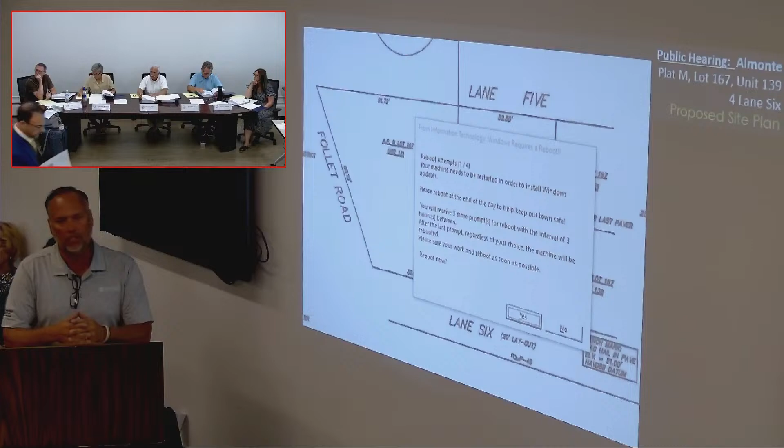So I'm here tonight to talk about my addition that I'm planning on doing. I'm raising my existing house up, putting a foundation underneath it, putting it back down on its footprint, bumping one wall out 4 feet and putting a second floor addition on with a sundeck. It's in Breakwater Village. I'm here because we have some zoning restrictions. I'm governed under the 60-40 rule, and my current design meets all the setbacks, bars, and height restrictions.

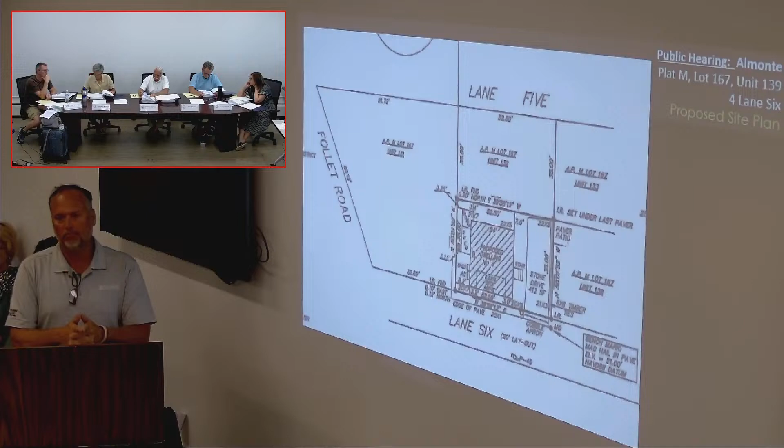Okay, and you're here for a special use permit? I am here for a special use permit. Have you been before the Breakwater Village Association for approval? Yes, I have. And you received that approval? I did. As well as the planning board approval. Do you have any witnesses you want to call? No, I didn't.

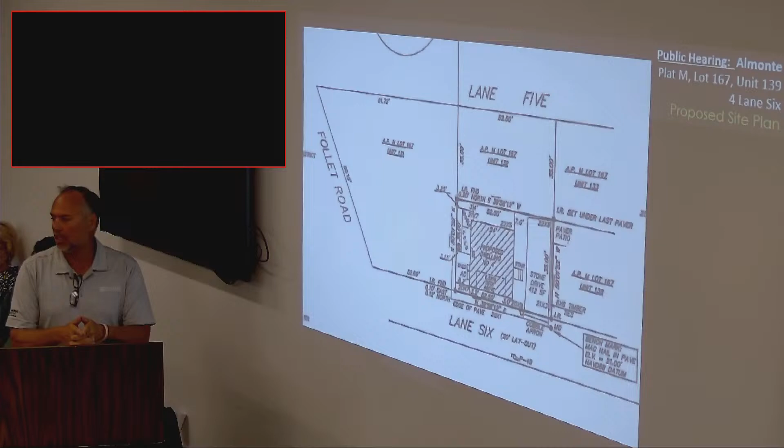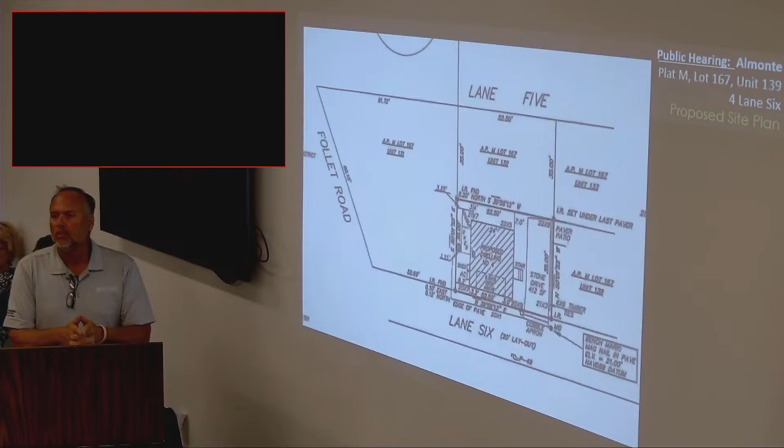Oh, go ahead. Mr. Almonte, hi. Could you just describe the surrounding properties, the properties that are near you? Can you give me an idea of what the height of the buildings are? Sure, okay. You have a pointer on the podium. Oh, okay. This is my existing dwelling right here. My neighbor here, this... sorry, is it the one bordered in yellow or the one right there?

139 right here. I don't know why this one's bordered. This is the neighbor behind me. This house is basically identical to my height, roughly 14 feet to the peak currently. This neighbor's house right here is approximately about 30 feet high, and my next door neighbor, this side right here, is about 35 feet high. The 30 and 35 feet high ones are newer builds, would you say? These are pre-2010 builds. This one I want to say was 2005. This one is about roughly that same era. So I'm governed under the current rules, which is 24 feet high and 60/40 because of my lot size, which is under 2,000 square feet.

Okay, and from there, where is the water? The ocean is about... well, there's a cliff right at the end, which is Shore Road. It basically runs perpendicular to Lane 6, and it's down a cliff, and it basically runs along the shore all the way to Galilee. Okay, and this road here, what is that road? This is Follet, and there's wetlands back here.

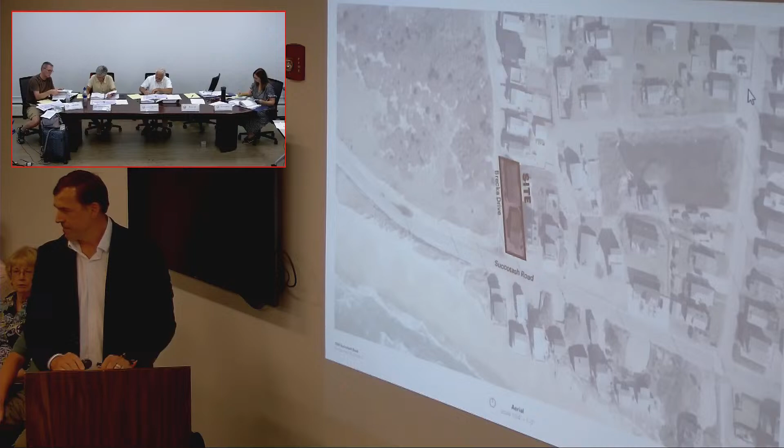In a minute I'm going to let Jake walk you through this, but first, what's your profession, Mr. Watkins? I'm an architect. How long have you been an architect? 25 years. Have you been accepted as an expert in architecture by municipal boards previously? Yes. I would request that Mr. Watkins be so recognized tonight. For the purposes of this hearing, Mr. Watkins will be recognized as an expert in architecture.

Yes, so Jake, if you will — I'll run through a few slides of the project. This is the first slide showing the location on Succotash Road and Brecka. The neighborhood is generally characterized as a dense neighborhood, single family and multifamily homes.

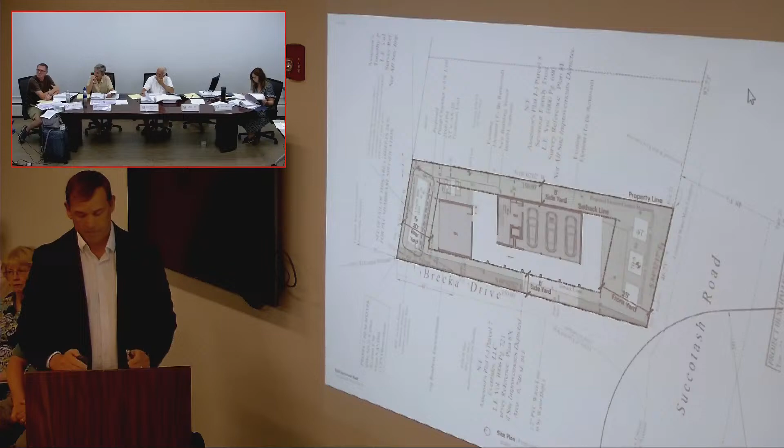This is just showing how the rear yard will become more conforming, from currently 7.1 feet to 21.25 feet; 14.8 feet to 25 feet in the front; and 2.2 feet on the side to 8 feet on the side.

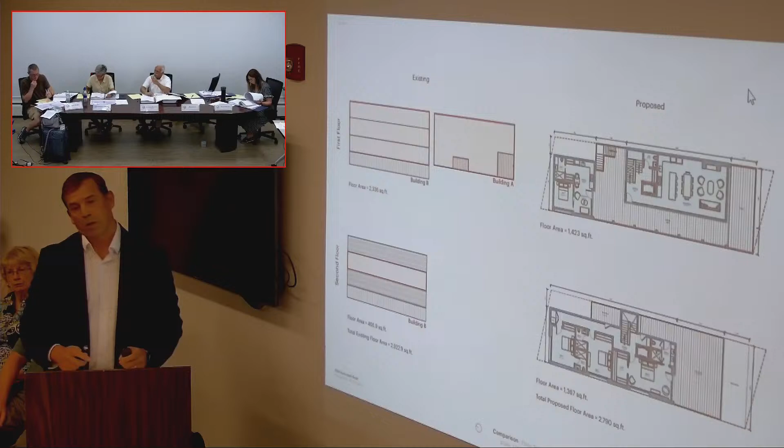From a square footage point of view, the total square footage will also be brought down from 2,922 to 2,790. So from both the coverage perspective and the total area perspective, we're actually reducing the amount of square footage on the site.

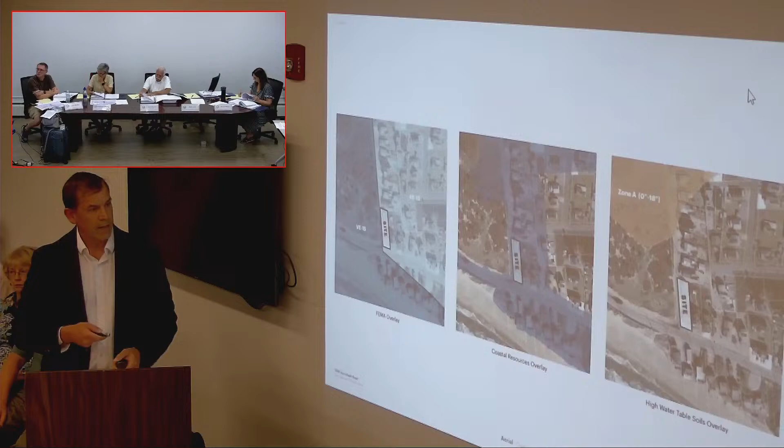There are a number of encumbrances on the site: FEMA overlay, coastal resources overlay, and high water table soils overlay, which we are addressing with the design.

The biggest point we're addressing is making the new residence FEMA compliant. The current average grade is at 8. The base flood elevation is at grade 13. The current lower level of both residences is about 5 feet under the current base flood elevation of 13. The new occupiable first floor will be raised above the base flood elevation of 13 to 17, so 4 feet above. The lower level will be used as storage and parking, with a second story placed above as well.

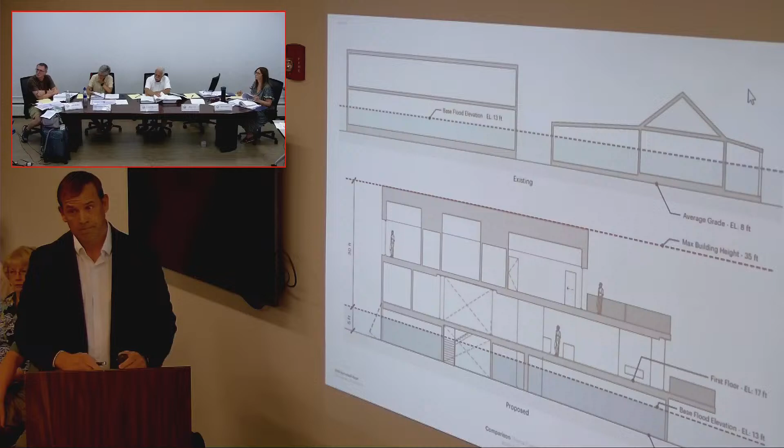The total height of the project will be 35 feet, 30 feet above the base flood elevation line. All we're showing here is that from all the different zoning perspectives, we're either making it completely conforming or more conforming than its current state. The base flood elevation compliance means it will become FEMA compliant.

All the setbacks will conform. The overall coverage is being reduced by 160 square feet, and the overall floor area is being reduced by 132 square feet.

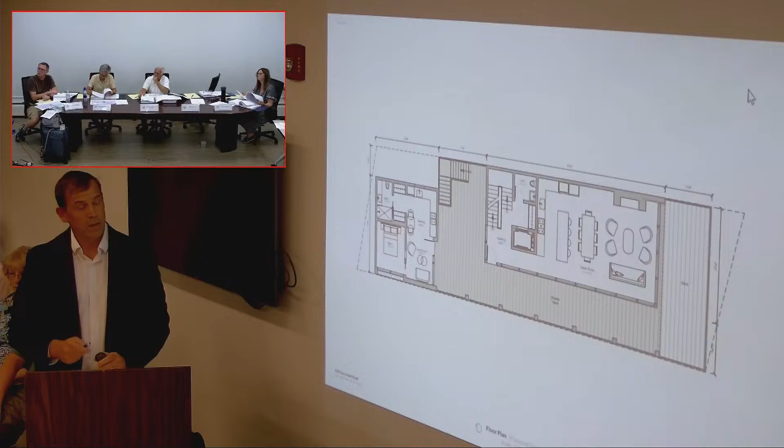This is a series of plans showing architecturally what we're doing. The lower level will be used for off-street parking and in-garage parking, with storage space on this rear footprint. The main level is accessed through the stairway above the FEMA base flood elevation line, with the main living space toward the front on Succotash and an in-law unit at the rear.

The second floor consists of 3 bedrooms, accessed from the stairway from the main level we were just looking at. So when you're looking at the total structure, it looks like a complete single element on the site, raised above the floodplain, with living space and bedroom space on the second floor.

I ask Al Diorio to address the site parameters. If there are any questions for Mr. Watkins, that's the extent of his presentation, so it would be appropriate to inquire of him now.

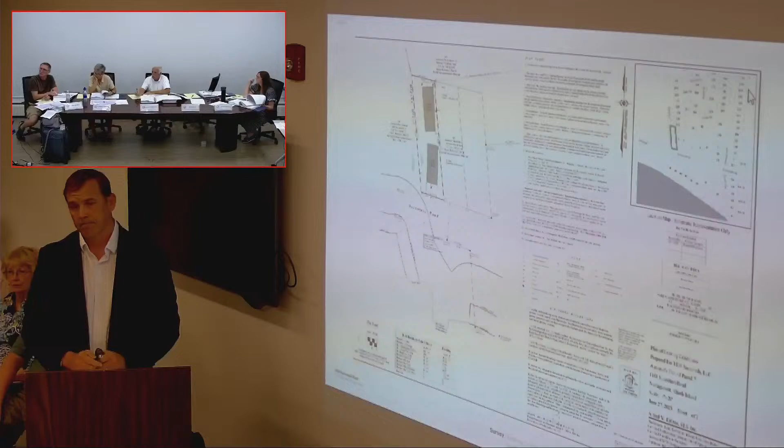Sure, okay. I understand you clearly, we're only looking for special use permits, there are no setback requirements, no violations there, you're not meeting any... you're meeting them all. You're becoming less non-conforming. Yes. And not necessarily conforming. Yes. Got it, thank you.

Is the character of the dwelling and the proposed structure consistent with the surrounding area? I'd say it directly derives from the vernacular in the neighborhood - the pitched roof, the wood siding, the window fenestration, the divided lights - it's all derived directly from the coastal vernaculars around the neighborhood.

And you also mentioned aging in place. Is there... I didn't mention that. So I can have the principals speak at the end of the presentation about what their intended use is for the property.

Okay, can you go to the floor plan for a minute? What is this? That's an elevator. That's all I need to know, thank you. That's what I thought. Are there any further questions for Mr. Watkins? Thank you, Mr. Watkins.

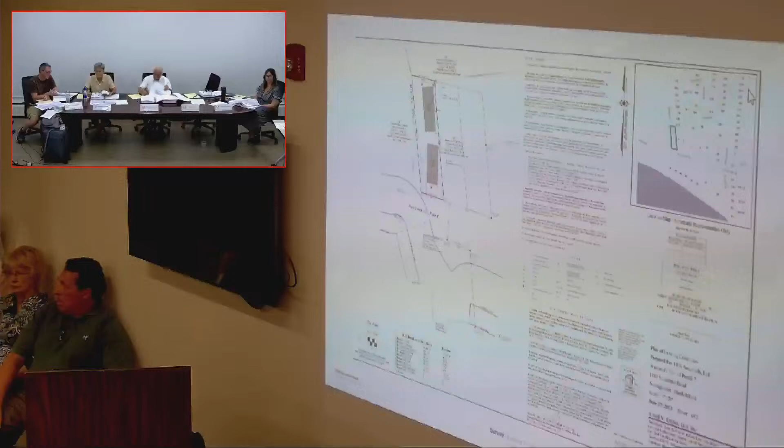Please raise your right hand. Do you solemnly swear that the testimony you're about to give will be the truth, the whole truth, and nothing but the truth, so help you God? I do. Please state your name and spell your last name. Alfred W. Diorio, last name D-I-O-R-I-O.

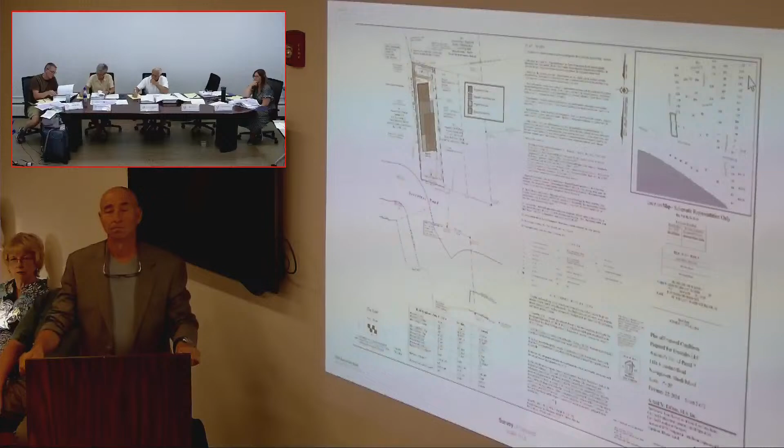Thank you, Mr. Diorio. What is your profession? I'm a professional land surveyor. And how long have you been a professional land surveyor? 45 years. Do you have any other professional certifications? Yes, I do. What are those certifications? I hold a Class 2 and 4 designer's license for DEM. I'm also a certified floodplain manager, and I have a designation as a certified professional in erosion and sediment control.

Okay, and that gives you the credentials to design OWTS and stormwater systems in compliance with DEM regulations? Within the confines of Class 2, that is correct. And how long have you been developing site plans and consulting on land use projects for clients? Something in excess of 50 years. And how many residential development projects have you prepared site work on? Around about... hundreds. And have many of those projects been in coastal communities? Yes. And that includes design of OWTS and related systems? That is correct. Have you been accepted as an expert by municipal boards in the past? Yes, I have.

I request that Mr. Diorio be accepted as an expert in site design and compliance with DEM regulations and as a professional registered land surveyor. For the purposes of this hearing, Mr. Diorio will be recognized as an expert witness, as a professional land surveyor, site design, and DEM regulations. Thank you, Mr. Chairman.

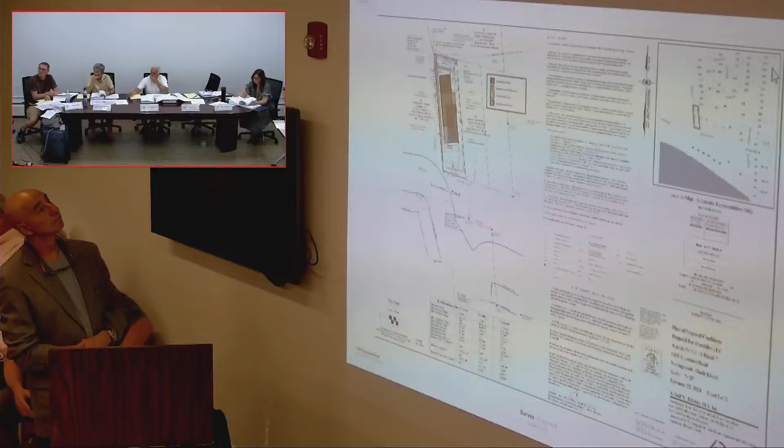Did you design, Al, the site plan for the property at 1108 Succotash Road? Yes, I did. Can you please walk us through how the OWTS system works? I can, and I'll preface that by saying I'm sure the zoning board members are very familiar with these kinds of systems. I'll be as brief as possible, but if there are questions, please just let me know and I'll dig deep.

Generally, effluent leaves the building via a building sewer. It then is transported by gravity to a specially designed septic tank, which also has a treatment pod over it. This is where the denitrification process takes place. The effluent leaves the pod and is directed to a pump chamber, and in this pump chamber there is a special UV disinfectant component.

This effluent is then discharged into the bottomless sand filter at the northerly portion of the site. I'll draw your attention to the one component that goes above and beyond what most denitrification systems embody, and that is the UV disinfectant component.

Did this system receive DEM approval? Yes, it did. And did CRMC provide any comment on this? We have a CRMC preliminary determination.

Does this OWTS system comply with all state and local regulations? Yes, it does. And did you design the stormwater treatment for the property? Yes, I did. Can you please describe how that system operates?

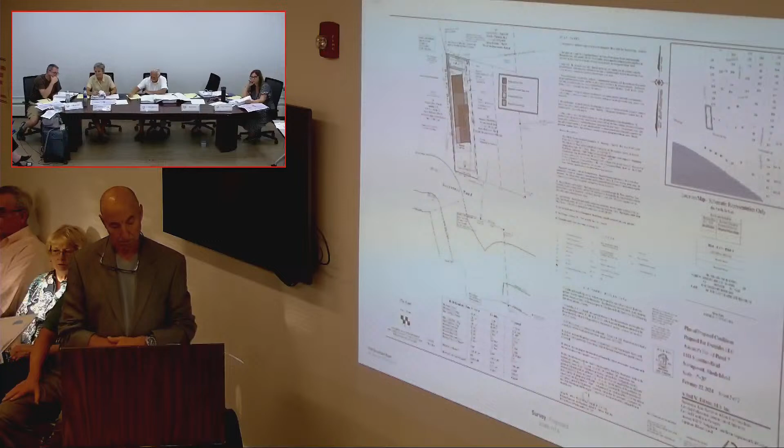Yes. And does the project pose any threat to public health, safety, or property? No, it does not. And does it interfere with access to light? No, it does not.

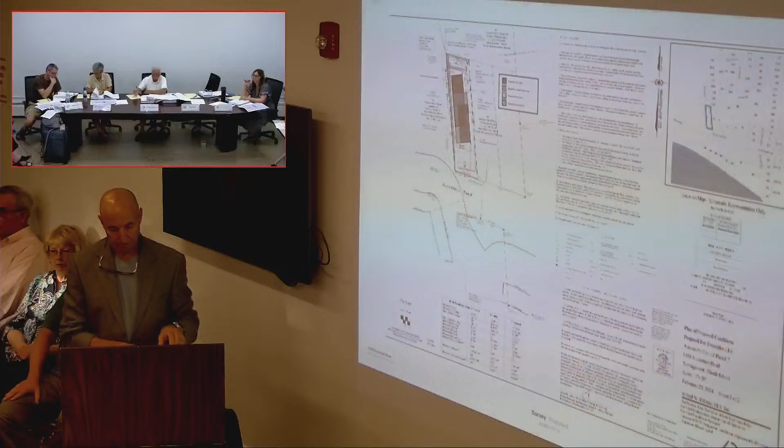There was one letter in the packet that wasn't really a letter in opposition, but it was questioning something. Did you know... let me get it out.

I think this is really an architectural question. Sorry. So perhaps we could see if there are any other questions for Al, and if there aren't, then I can bring Jake back up.

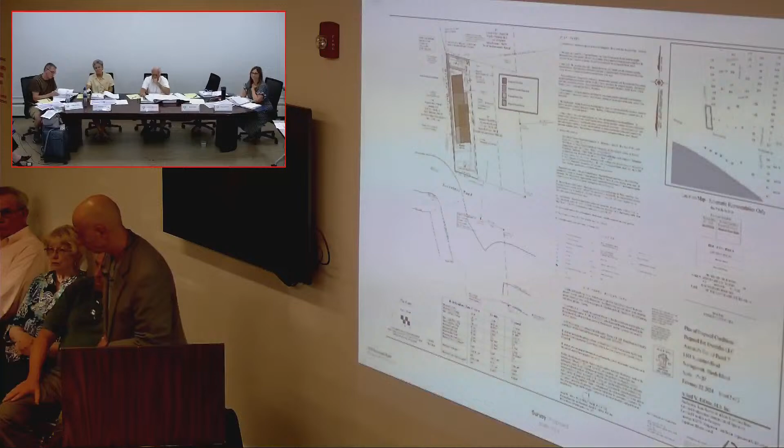Absolutely. Anything else for Al? And I'm Joan, I wrote the letter. Oh, okay. Yes, okay, I can address that. Jake, do you want to comment on that letter briefly? Joan, okay, Joan.

Can you repeat your question? There is a letter from somebody named Joan, who is obviously here, in the packet, which asks a question and doesn't really seem to oppose the project, but asks about some sort of orientation of the project on the lot, and maybe that there's some view issues or something like that. But I don't know, I was hoping somebody could explain it to me because I don't really understand it.

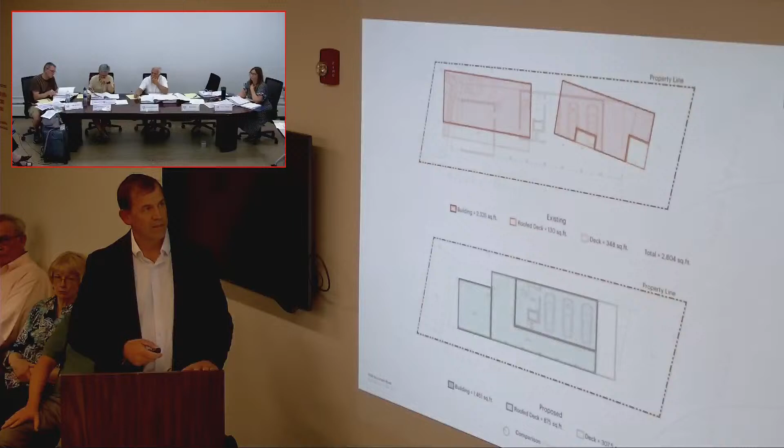If you're talking about the frontage on Succotash, which is here - this is the existing, this is the proposed. The existing is actually too far forward on Succotash. It's not congruent with the other associated neighborhood structures. The new design will be pushed further back from Succotash, and I think being more in line with the adjacent property. So it does...

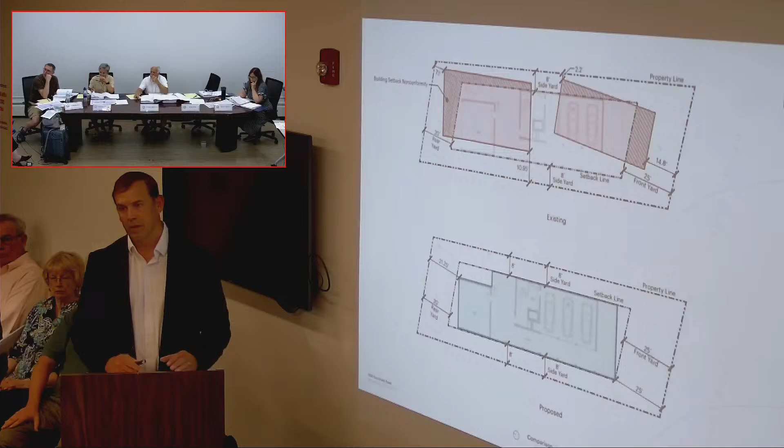Okay, it is pushed further back. It's pushed further back and might be more congruent with the other massing that is in the neighborhood. The concern seems to be that there's now a longer roof line.

A longer roof line, and the person who wrote the letter is actually here, so maybe we just... if she's going to object at that time, we'll just hear from her.

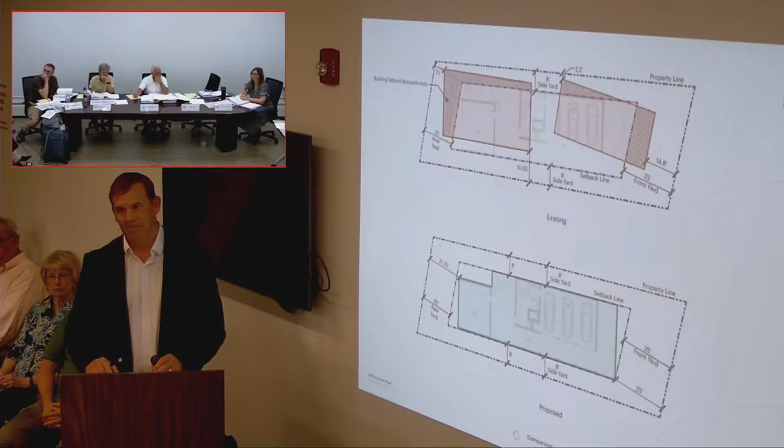Okay, I'll take that. So I think, would the board... Eric, why don't you come up, and we'll have the principal come up briefly, because I know you had a question about aging in place.

I'm okay, oh, that question's resolved. I just didn't see how anyone could age in place without an elevator, and you said that there's an elevator there, so I'm okay, good.

Well, if the board doesn't require testimony from the principal, then I will conclude our presentation and just like to say that we think this project clearly satisfies the standards that were required to be met tonight. So we're relying on the testimony that was presented, all of the exhibits, and everything you have in your file, and we request that the board approve this project.

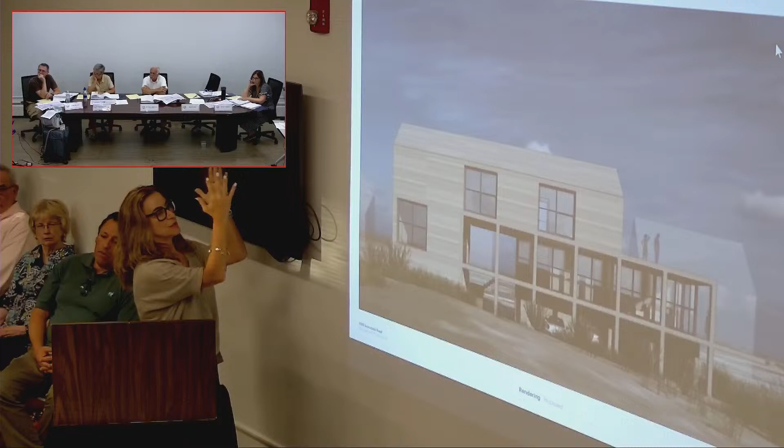My only question was about the roof line being very long, because all the houses on Brecca have peaks facing this way, and I questioned if there's anything that can be done on the roof line to engage it with Brecca, because right now it fits really well with Succotash. But it's a question. The other question was about the amount of glass, because we have a lot of birds and wildlife in the area, and birds can hit the glass and die, fall, or get injured. But maybe there's something with the tinting of the glass we can do to prevent that. That's all I have to say.

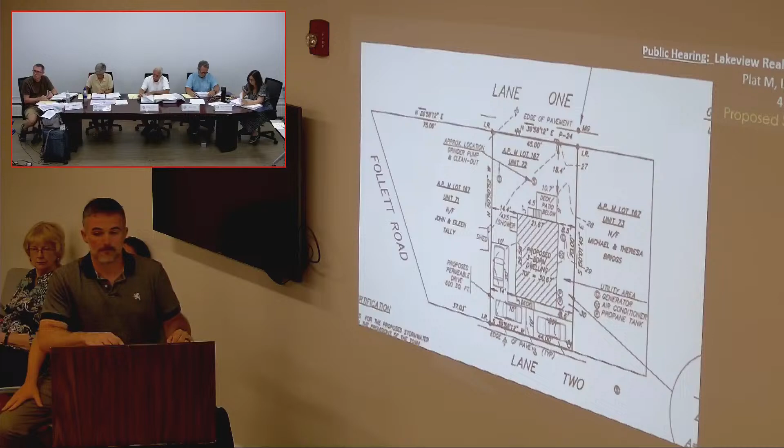So you meet all the requirements, you're just looking for a special use permit. You have approval from the Breakwater Village? Yes. March 29th.

Pretty straightforward. Yes, ma'am? So some of the findings, some of the testimony we would like to hear would help us make the findings and make the determinations. Can you just describe the project and how it fits into the rest of the area? How does it affect anybody's view, light, access to the water, anything like that? If you could just talk about that, that would help us.

Okay. So the owner, Kristen, is selling her house, I believe in Seacon, and she's going to be moving here full-time. She has a daughter who commutes to one of the local colleges, so it's going to be for them. No plans on renting it, it's just a single-family home, 3-bedroom. It's a beautiful design with a couple of porches. The railings and aesthetics all kind of match the neighborhood. It's conforming to the height restriction of Breakwater Village. It's not really on the edge of anything that would be blocking anyone's view. Anyone in the middle of this neighborhood doesn't have a direct view as it is.

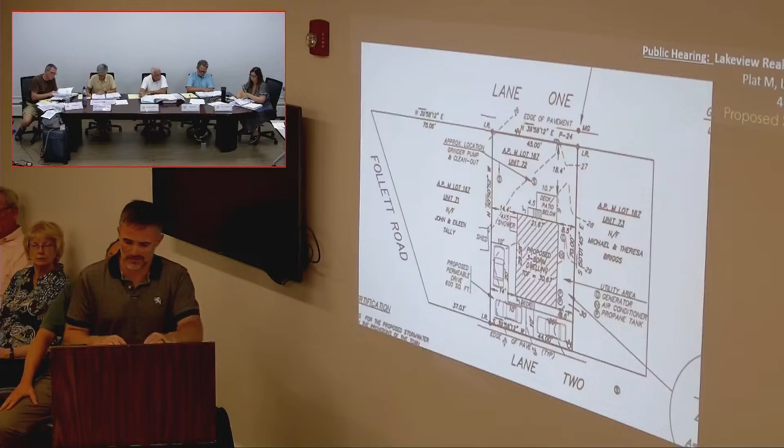Yeah, it's plenty of off-street parking and in conformance of basically everything that they could come up with, and it does have the planning board's recommendation as well. Any other specific questions on that? How many bedrooms? 3. It's going from 2 to 3.

Jill, do we have to determine the appropriateness of the height on this, or is that part of this? You can. Okay, let's. Are you increasing the height at all? Yes. Okay, and what is the maximum height? The height is 28 feet. 28 feet? Okay, is that for a lot this size the maximum height? Yes, that's correct. Good.

Sure, thank you. Brian, you want this back? Yes, please. Looks like that's it. Thank you.

Is there anyone who'd like to speak in favor of this proposal as a proponent? Seeing none, is there any opponents, people who'd like to speak against this proposal? None either.

Okay, if there's no further testimony, then I'll look for a motion to close the public hearing. So moved. Second. All those in favor? Aye. Okay, it's closed. What is the board's pleasure?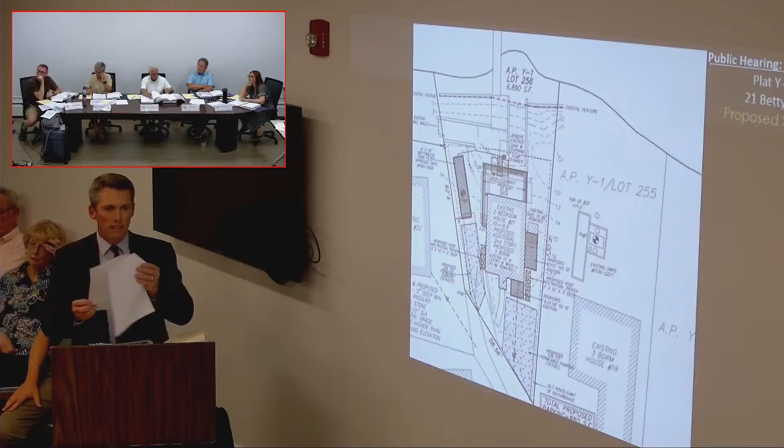And then the lot is obviously undersized. It's in what's called the narrows of Harbor Island. Altogether, the lot is about 6,890 square feet, located in Harbor Island in an R20 zone. The existing structure is 24 by 32, only 768 square feet, and is a single-family dwelling. Again, this will be a single-family dwelling after renovation if approved.

There's a deck on site as well as a shed. The shed will be removed, which is over on the northern side of the home, and in its place, where the dark shadow is, will be a stairwell. The stairwell had to be located in that spot due to the septic system and the driveway on the southern side. There's really no other place to add that stairwell to allow the second floor to be constructed on the house. The actual lower level is uninhabitable due to the flood zone.

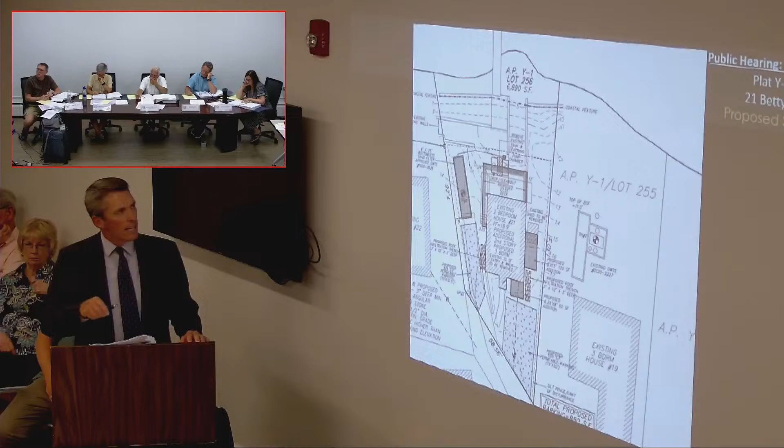So we need a variance on the side setback for the stairwell, and we're asking for a special use permit in the coastal overlay district. Notably, last time we were here, I think we asked for a 16-foot deck to the west. We got approval for 12 feet, and I think the ask now is 14 feet. So we understand if you have questions about that, we're happy to answer them. Again, this will remain a two-bedroom house. It's really just an improvement for the renovation to allow the McShanes to live there in the summer when they come back to visit.

With that, I'd like to ask Alec McShane to come up.

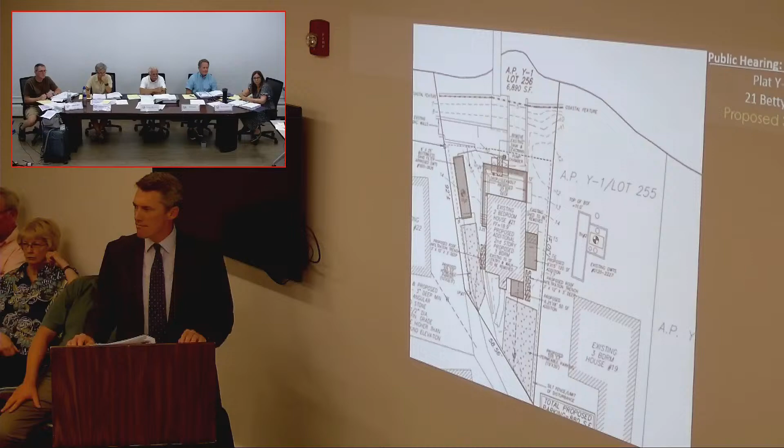Hey, Jim, can you hold on one second? Sure. This is a rough night for me, so I just realized when he was testifying, did you say Patty Sylvia is your mom? She is. She's really good friends with my wife. I think I can sit here dispassionately, but it just occurred to me, I didn't realize that until you just said it, and I didn't make the connection. But that wouldn't be a legal conflict, as long as you think you can. Yeah, no, I think I can. All right, unless Mr. Callahan objects.

No, Jim. Please raise your right hand. Do you solemnly swear that the testimony you're about to give will be the truth, the whole truth, and nothing but the truth, so help you God? I do. Please state your name and spell your full name for me. Alec, A-L-E-C, McShane, M-C-S-H-A-N-E. Thank you.

Alec, where do you live? Just outside of Zurich in Switzerland. And how many children do you have? One, ten years old. And you and Chantel have owned the property at Betty Hill Road since 2019? Yes. And have you ever resided there? No. And why is that? It's uninhabitable. Maybe you could convince a student to live there, but no.

And do you visit Rhode Island each summer? Every summer for five weeks. And right now you're living with your mother because of the condition of the home? Yes. And what are the renovations you hope to achieve here? So basically we want to have the first floor as a simple kitchen and living room, and then two bedrooms on the second floor, one for my son and one for my wife and I. And is there an office space? Yeah, there's a small office space open to the living area on the first floor.

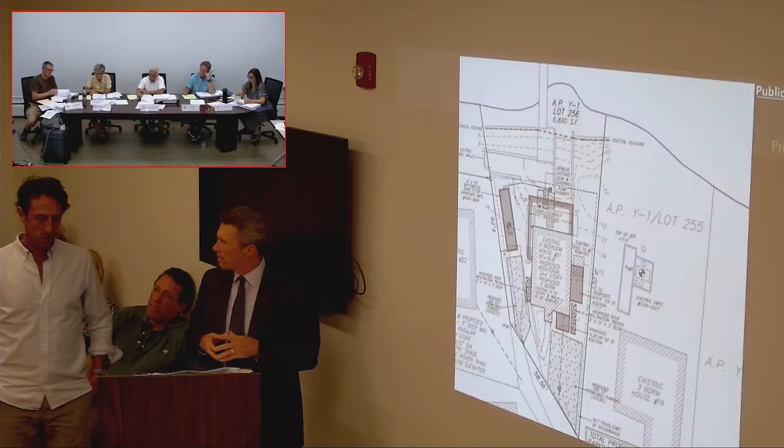And the bottom floor, the ground level, that's not habitable, correct? It's sort of a garage, it's below the flood zone. I don't know the technical term. And there are two bedrooms now in the house, which will remain two bedrooms if you get approval.

Exactly. And is it fair to say you went through a number of iterations here, and the only way you could fit the stairwell to the second floor is on the northern side? Yes, part of the delay from 2019 until now was trying to find a creative solution to get up to the second floor, and that was the best solution we could find. And there's some parking on the southern side and also the eastern side, but also the septic is on the eastern or southern side as well, correct? Yes. And that limits what you can do. Yes.

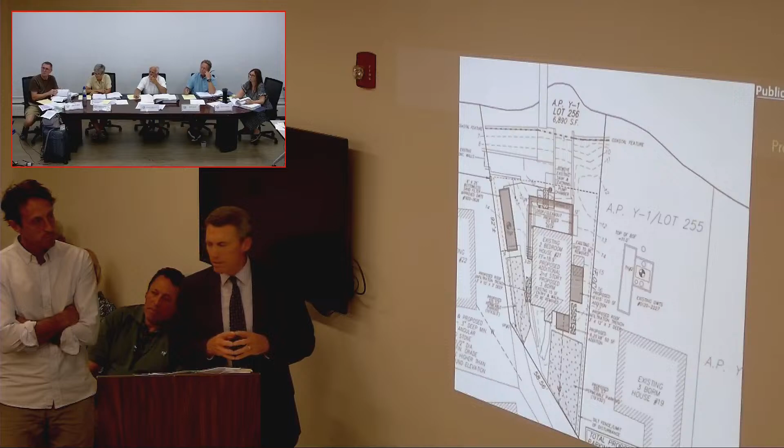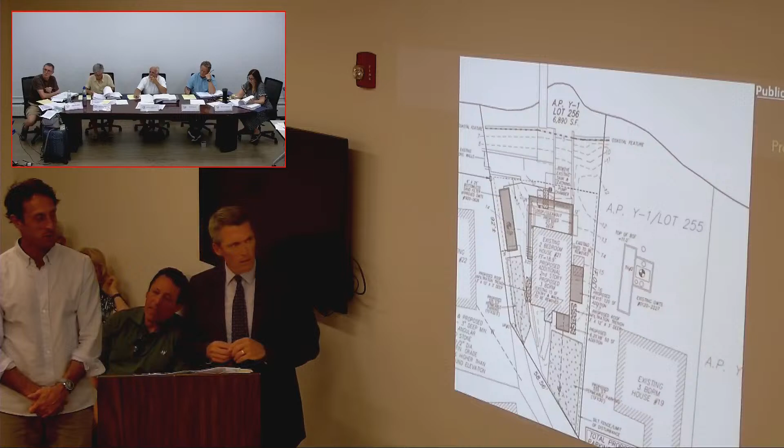And is it fair to say the lot is a unique shape? Yeah, I think it's fair to say trapezoidal. And will this renovation allow your family to live, work, and play together in the home? Yes, definitely. I mean, our intention is to spend more time than the five weeks we spend here now in the summer. And the proposed renovation is not due to any physical or economic issue of anyone in your family? No. And the hardship here is based on the size of the home, the shape and size of the lot, correct? Indeed. And you're not really seeking to gain financially from this renovation.

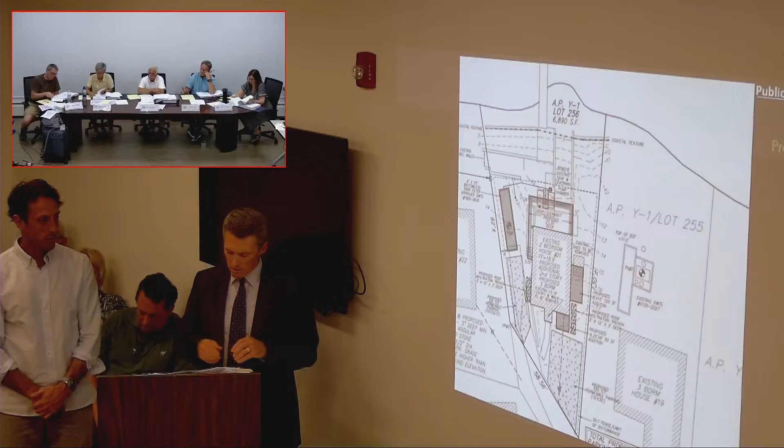It's quite the opposite, it's actually going to be quite expensive. Yes, it's going to be extremely expensive. And you feel this change will alter the general character of the area in any way? I think for the better. From a curb appeal perspective, it should be fitting with the surrounding homes. And we discussed the comprehensive plan today. From what we understand on our analysis, this proposal is consistent with the comprehensive plan.

Yes. And again, regarding the deck, the prior proposal back in 2020 was to extend out to 16 feet, correct? Yes. And we got approval, I think, for 12. Yes, I believe so. And this request is for 14. We're not sure how that came to be, but that's the current request. Yes. And if the board saw fit to only allow 12, are you okay with that condition? We would be okay with that.

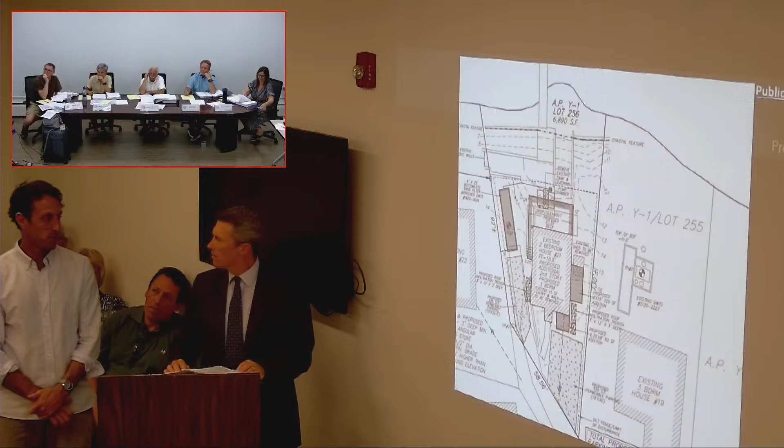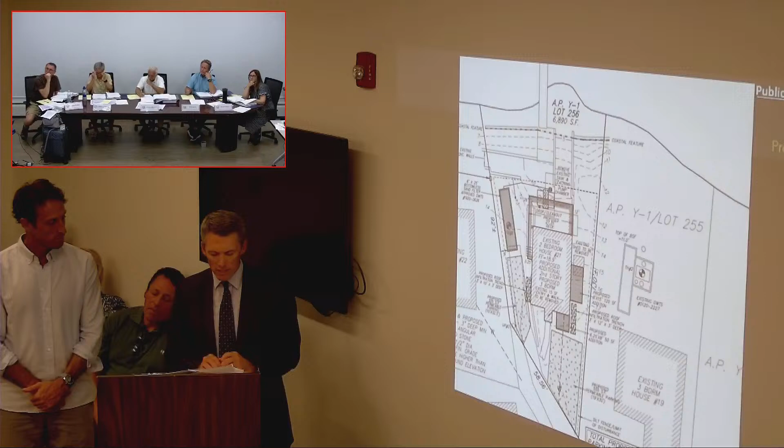And the septic system actually is, I think, a 3-bedroom septic, but you're not planning that. I think we cannot have 3 bedrooms, from my understanding. We don't really have a need or desire to. I don't know the details, but I understood that we had to have capacity with the septic for 3 bedrooms. But the smallest possible septic would be ideal for us, because the bigger, the more expensive. And regarding the special use permits for the coastal overlay, is it fair to say that the plan will not impair the public convenience or welfare?

No. And it will not result in or create conditions that will impair the public health, safety, morals, and general welfare of the area? It will not. And will not impair or injure the use of any surrounding property? No. If no further questions.

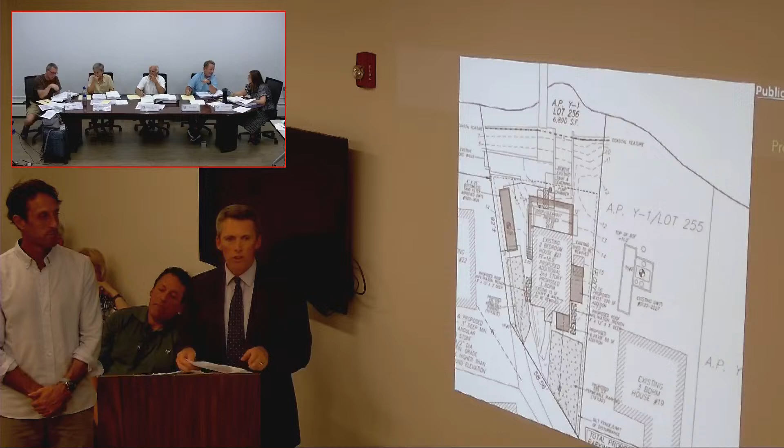Any questions, board? I have a couple. First, can you talk a little more about the deck, what's the purpose of going to 14 feet? I think because the lot size is so small, and also to keep us off the lawn, close to the water, like that becomes basically the lawn for the property. That's the main outdoor space. You have small bits and pieces and triangles, but no place to really gather, to have my parents over for a barbecue or whatever.

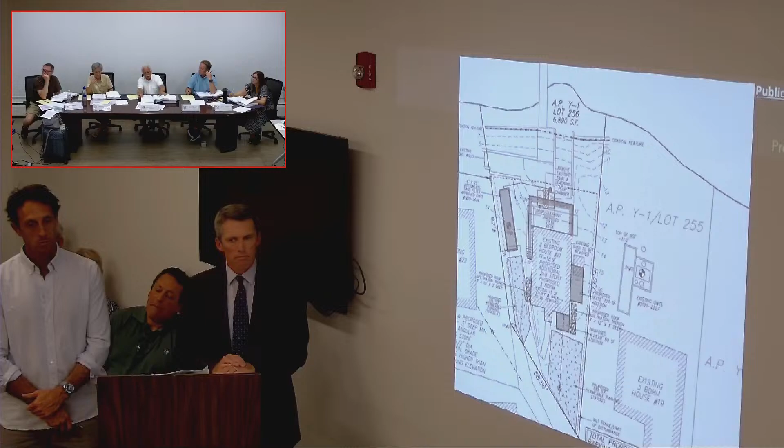And the staircase on the right, north side, has that changed in size? From the previous time, no. What other changes have been made from the previous application? None. Just the 12 to 14 foot on the deck? Yeah. Everything else is the same? I thought there was another change. That's it too.

I believe it's just the deck changing in size. It would be closer to the coastal feature. That might be the other change you're referencing, but the size of the deck is just increasing by 2 feet.

Any comments about the denial from the planning board? No comment.

One question, Jim. When Mr. McShane bought the property, the house was configured as it's depicted here, there haven't been any changes? In other words, he hasn't created the hardship. Nothing has changed. And I think this is just an error in the memo you filed with us. It says 2 children, but I think the testimony is that there's 1, just so we have that. It feels like 2. I can ask him that in the hallway. Well, wait till you have 2, that feels like 4.

Any further questions from the board? Any other testimony? We're good to go? No, thank you. Thank you.

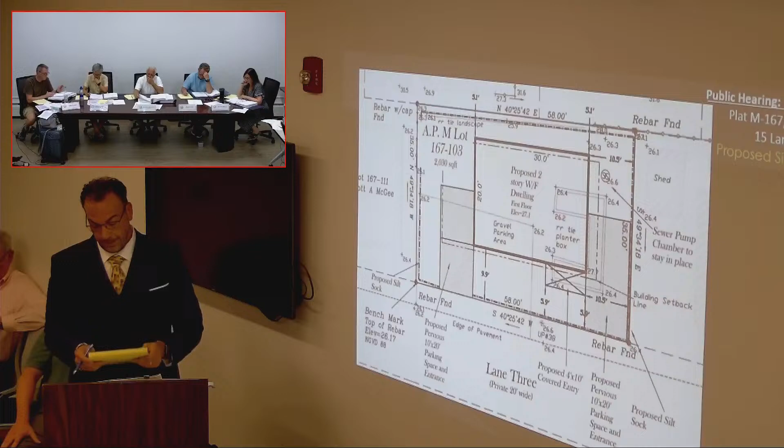This project does comply with the comprehensive plan of the town, and as proposed will not substantially or permanently injure the use of any surrounding property. As a matter of fact, it's going to look pretty much like every other surrounding home in the neighborhood. I say pretty much because I don't know paint color, things of that nature. The granting of this special use will not alter the general characteristics of the surrounding area.

And it will substantially serve the public convenience and welfare. There will be on-site parking, there will be no traffic issues, and it will not result in or create any condition that will harm the public health, safety, morals, or general welfare.

So the variances that we are seeking are a setback. Our proposed setback is 5.1 feet on the rear yard, which the new regulations require 5 feet, but the prior ones were 6 feet. The floor ratio is 0.49.

And it says the structure height, but I think we're within that structure height as I pulled up the regulations just this morning from the town website.

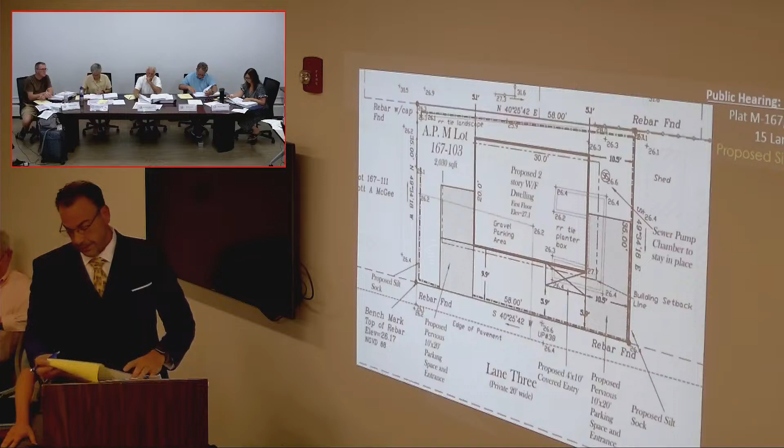The purpose of this building is Mr. and Mrs. Zangrilli are going to make this their permanent home.

Now, the first floor, as you could see from the building plans, a lot of the entryways are 36 inches, which is bigger than a standard house.

They are 36 inches. Reason being is that Mrs. Zangrilli does require assistance as she is handicapped, and I believe the condition will not improve, and she'll probably require other means just to get around the house.

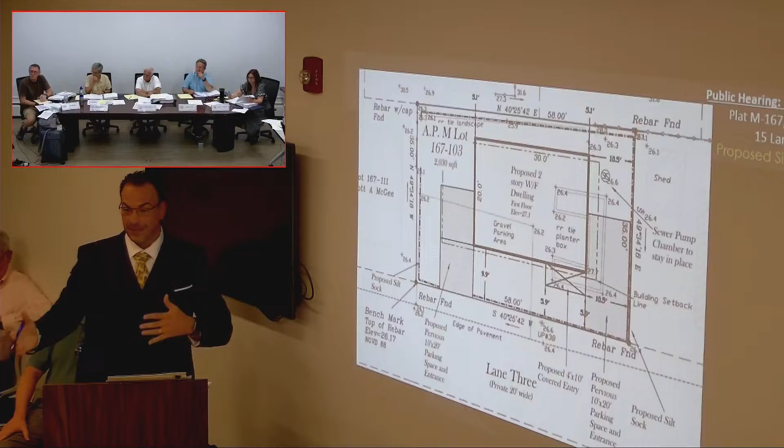There's a first floor bedroom, which, because of these extra large entryways and hallways, and means for her to just get around the kitchen and bathroom, restricted them from putting a second bedroom, which they would like to enjoy with their grandchildren and children as they visit.

This application's plans were drafted according to the prior regulations from when they bought the prior home. And as new regulations were adopted this year, it seems it's hamstrung them to some effect.

Now, that canopy they're asking for, which we are asking the special use for, is to help Mrs. Zangrilli as she enters and exits the home. It does take her some time to get in and out of the house, and it does take quite a bit to just get to the car.

So that overhang, which does include now what would be a sun deck, is just to keep the elements away from Mrs. Zangrilli while it takes some time to maneuver her around.

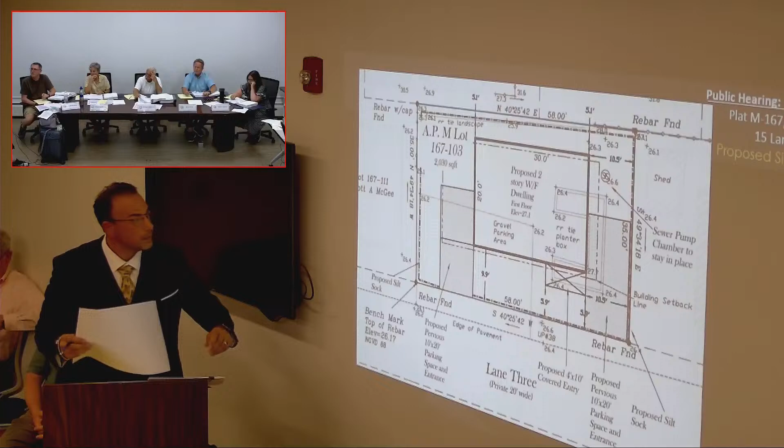And where is that on the plan? Oh, that is on... okay, there's the pointer. That would be right there, if I'm not mistaken, there's a covered entry. Yes, it says covered entry, so that's the overhang, and then there's a sun deck, which creates the relief they need to get Mrs. Zangrilli in and out of the house.

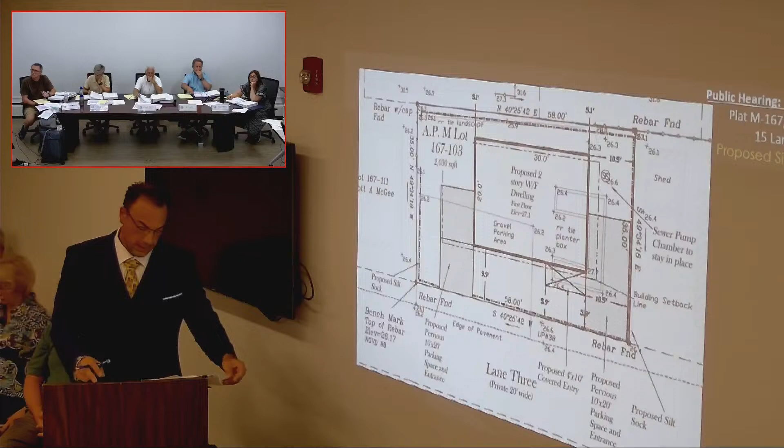This parcel is on the larger side of the surrounding properties, and I believe a comprehensive boundary survey was emailed to the board, just to show the setbacks of all the neighboring properties, which are all actually less than what we're asking.

If I may, I do have copies if the board would like to review. Mr. Vice Chairman, that was what I had emailed to you before. May I? Yes, ma'am. Thank you. Would you like to submit this as an exhibit? Yes, submit as a full exhibit.

So if you'll see, the properties both from the southwest and northeast have rear setbacks of 4.9 on the southwest, and 4.8 on the McGee property. The Carpenter property has setbacks of 3.9. And then on the Lane 4 properties, towards the back, we have setback lines of 3.1, 2.9, and 4.8.

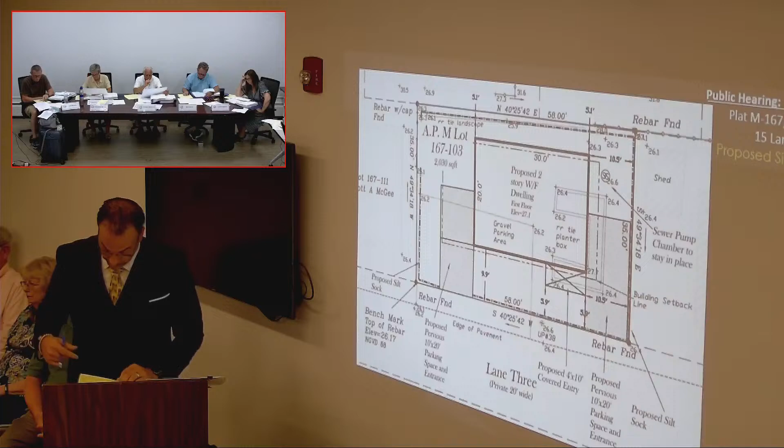So it's well within the characteristics of the direct abutting structures. The average setback as proposed by Mr. Palmer ranges between 3.2 and 3.9 in the surrounding area. So we're simply asking for the same relief that already exists for all the abutting properties.

Now, as far as height, I know there was mention of it, but as I read the regulation, I believe we're within the height regulations. It says 23, but when I pulled them up today, it was still around 26 for this size parcel. However, when I looked at the plan with the sun deck and the pitch of the roof, any alteration would put the pitch closer to a flat roof. And the sun deck isn't for aesthetic purposes — it's really not for the sun deck. It's just a nice little addition because the overhang would be required for Mrs. Zangrilli.

So for clarification, is 23-11 the requirement? It's what we're asking, 23-11. The regulations for zoning in the Breakwater District changed in 2024, and I don't think that's updated online yet.

I think that's where I need to clarify, because I pulled them up directly about 3 or 4 hours ago, just for clarification purposes. But even at 23, this is the relief we're seeking and the reason why. To put that second story, there really wouldn't be much we could do with the roof height, so it's kind of six of one, half dozen of the other for the Zangrillis.

So while we're here discussing this, I need to ask why the Breakwater Village Review denied the application. If I may bring up Mr. Zangrilli — I wasn't present at that meeting.

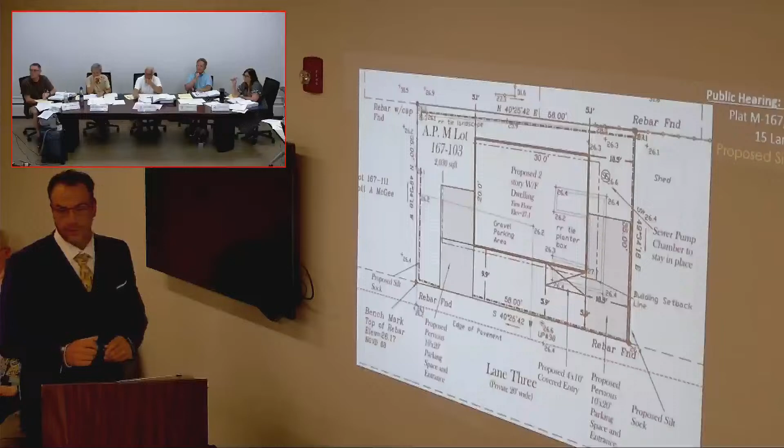Is there any way to reduce the floor area ratio? I don't think we've ever approved a FAR variance. Well, the floor area ratio was created to accommodate Mrs. Zangrilli. They tried to keep it all on a single floor, but because of her continuing and evolving need to get around the house, this was the minimum they could come up with.

Mr. Zangrilli has told me this is going to be their permanent home, a time to spend with family as well, and they want to make it as easy as possible for Mrs. Zangrilli. I don't think they're asking for too much floor area. As I stated before, it did meet the prior regulations with the court, which this board can revert back to if appropriate, and considering Mrs. Zangrilli's condition, I think this would be that type of situation.

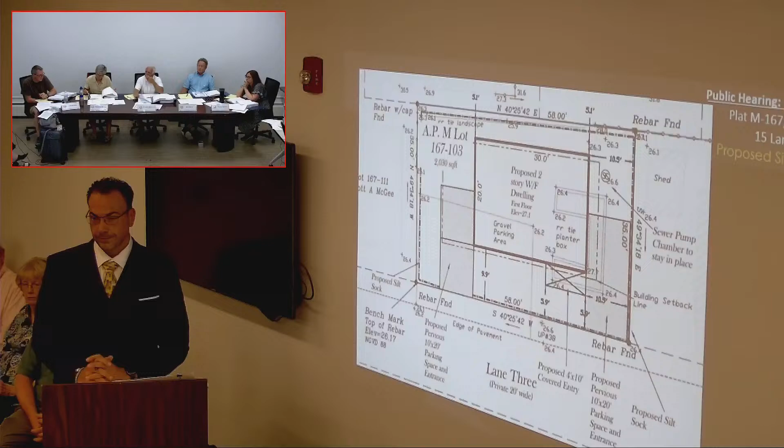Ryan, do you have the square footage of that canopy? It's 4 by—I can't tell from this. It would be 40 square feet. So it's 4 by 10? Is that contributing to the 135 feet that they—

No, nope, because that is considered a sun deck, and that's why it's a sun deck. Wait a minute, say that again. Sorry—4.8.16I states that sun decks up to 10% of the GFA shall be allowed without deduction from allowable FAR, and that falls within that.

So it comes down to square footage of the main floor. That's correct. Steve, I guess I have a question about it. We've had a bunch of these FAR variances before us, and we've always been disinclined and struggled with granting them. But is there—it just seems unreasonable to me that there's not an exception when you particularly have a situation where a disabled person may need to expand the footprint in order to allow accommodations, and the best architect in the world can't squeeze it under, reduce another 135 feet.

That may be the two things. One is the dimensional request modest? And two, is there a valid reason for the dimensional request other than I just want a bigger house? They're seeking to retire and downsize. I believe the FAR is what would be a modification request. If it wasn't for some of the other dimensional requests, this wouldn't have come to the board. The FAR dimensional request would have been granted administratively. There's a chart on page 2 that underlines what would be granted via 15% modification, and I believe the only one that wouldn't be considered is a front yard setback. So it's just the front yard that brought it here.

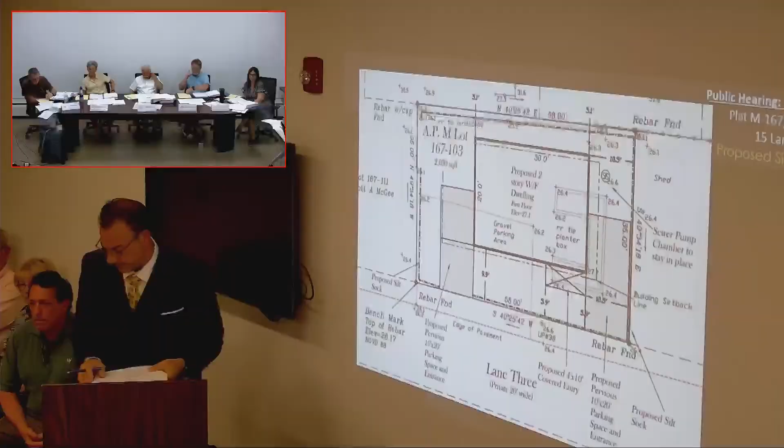Thank you. I don't have anything to do with this request, I wasn't asked to speak. My question is this whole discussion about the overhang for protection. I'm not sure I understand the question. I would just say this is public comment, unfortunately—you can say whatever you want, but it's not really a question and answer between you and the board, it's just your comment.

Okay, well, my comment would be, I helped my parents take care of my 67-year-old severely disabled brother in a wheelchair. I can attest to the fact that getting in and out of a home and into a car in the elements is really difficult. Sometimes my brother would be soaking wet if there was a downpour and we had to walk to the car to get him in. So I would say she definitely needs this overhang.

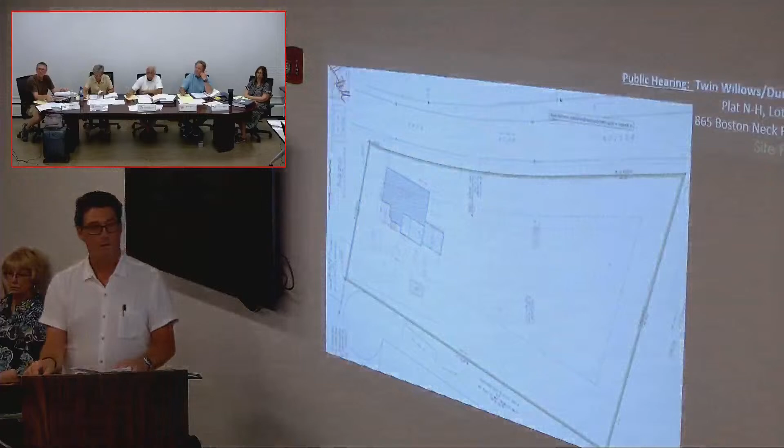Okay, Mr. Henderson, would you please just go through the plan for the board? So, this is Boston Neck Road here. This is the front of the building. On the back of the building, we're proposing an expansion of the dining area here and the kitchen in this area. This is the al fresco dining as it is now. We're proposing enclosing that. And this is the existing outdoor seating area.

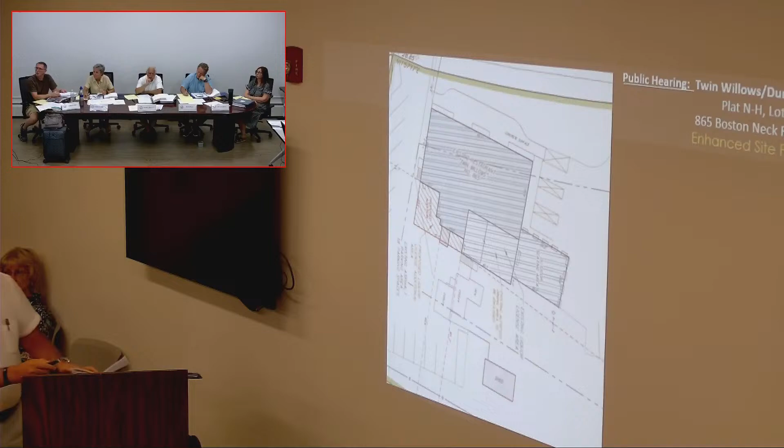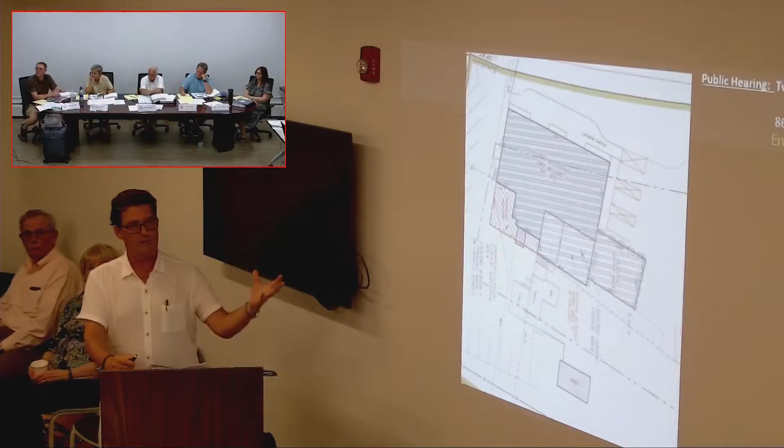Now, the al fresco dining, that exists now, correct? It's an open deck with a railing around it, and there's partial foundation underneath. For the expansion in this area, we will be putting in a more proper foundation.

What is the current square footage of the structures? The expanded dining area is approximately 420 square feet. The expanded kitchen area here is about 176 square feet. How about the size of the main building?

The main building, I have the overall footprint. I don't have the square footage for the existing here. Let's see if I can find it. 3,865 square feet for the indoor dining area.

Okay, with the al fresco? That doesn't include the al fresco. Including the al fresco, 973 square feet, should total 4,838 square feet. So this, the addition of the enclosed area that you show in red, that amounts to only 596 square feet? Yes. Okay, and is that less than 25% of the overall building?

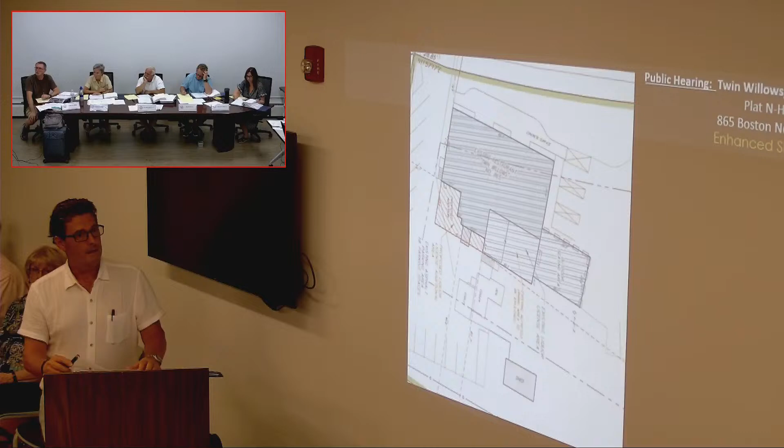The exterior appearance of the building as you have reviewed and designed it, is it going to change at all? The exterior of the building, we're going to improve it. Okay, what are you going to do? We're going to be adding some window systems here that can fold back like a NanaWall system, but only from sort of a guardrail or railing height up will be a window system that can fold back and open up. How about the front of the building?

The front of the building, we're proposing some minimum upgrades just along the front end here. What would those upgrades be? Windows, trying to fix the parapet wall, the parapet at the roof line.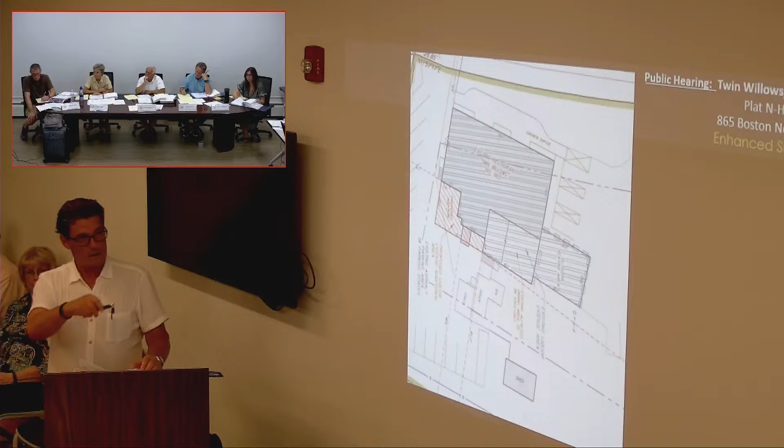So is this going to substantially change the exterior of the structure? No, only on the back side where the addition is. The front will basically appear the same, correct? Basically, yes.

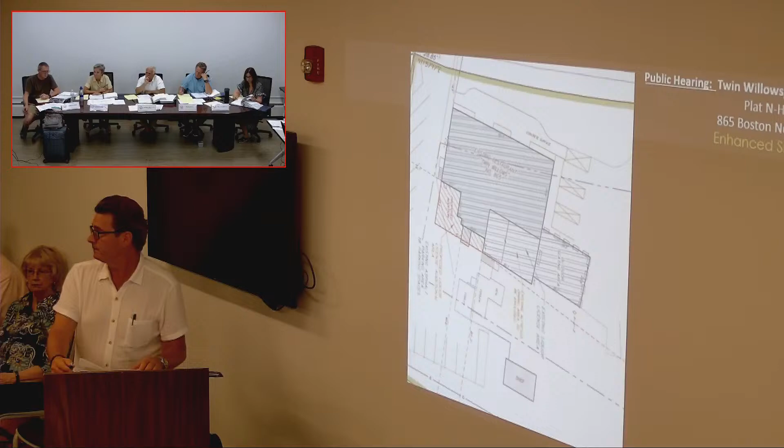Okay, I don't have any further questions for Mr. Henderson. Does the board have any? Oh, I do have one.

The deck to the right, north side, is that the existing deck? This here, yes, that's an existing outdoor seating area at grade level. Okay, it's at grade level.

It's been a while, I'm trying to remember this too. I'm trying to just remember where the al fresco is too. So the al fresco is that existing section there. Okay, that's the raised deck there.

Got it, these steps. We're not doing anything with refrigeration or pads for coolers or things like that, right? Everything's still the same, all contained.

Anything else before? Yeah. Okay, thank you. Next, I'm going to call Edward Pimentel.

Do you solemnly swear that the testimony you're about to give will be the truth, the whole truth, and nothing but the truth, so help you God? I do. Edward Pimentel for the record, P as in Paul, I-M-E-N-T-E-L.

Thank you, Mr. Pimentel. Where do you work? I am the zoning official for the city of East Providence by day, and I own a consulting practice. What's your consulting practice called? Pimentel Consulting Incorporated. Mr. Pimentel, have you been accepted as an expert witness in practically all the municipalities in the state? All 38 cities and towns outside of the city that I work for municipally.

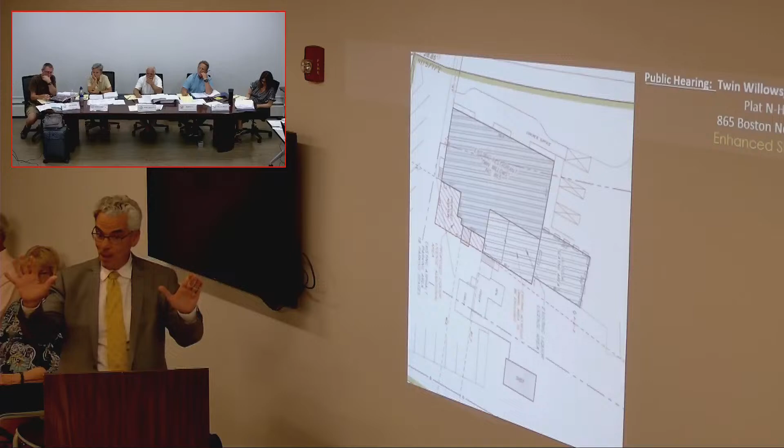We're still abiding by the fact that you have this anomaly of an inconsistent zone. It's zone residential. Not only does your future land use map state that this should be, but this property is in the special district of the Bonnet Shores and the Boston Neck Road. Within that special district, it states that this property should be commercially improved in accordance with your regulations.

Why it hasn't been rezoned is beyond me, but that's a moot point to me, because now we're following Rhode Island general law. Out of respect, because you have this inconsistency within your zoning regs, we made sure we maintained that 25% maximum requirement. So we made sure that we met those standards, those specific and objective standards that now went into law as of January 1st of this year.

Because prior to that, there used to be requirements like these innocuous subjective requirements, and the law, Rhode Island general law, says no more. You must apply specific and objective standards. We're meeting under the 25%.

We're respecting. I went around that neighborhood. I went there on several occasions, evenings, days, weekends. I went through the back neighborhood, looking at, because my core concern as a municipal planner is the improvements. Are we respectful of the neighborhood?

There's a residential neighborhood to the rear. There's huge growth there for purposes of visually buffering and noise buffering. It's all in my report, because obviously you want to be a good neighbor. Obviously, the intent of all developments is to be a good neighbor.

But under the law, you're also entitled to what you're entitled to. And we are absolutely entitled to the improvements that we are seeking tonight.

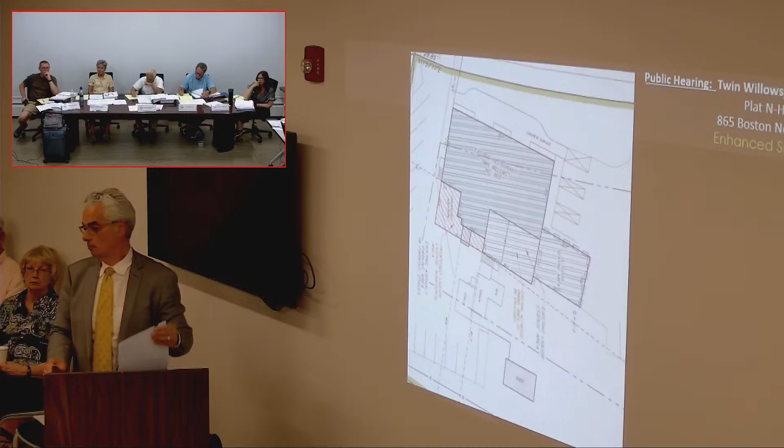Does everybody have Mr. Pimentel's report? Yes. Any questions? Thank you.

Please raise your right hand. Do you solemnly swear that the testimony you're about to give will be the truth, the whole truth, and nothing but the truth, so help you God? I do. Please state your name and spell your last. I'm William E. Coyle III, C-O-Y-L-E, I-I-I.

Thank you. Mr. Coyle, where are you employed? I'm the owner of William E. Coyle Jr. Associates, also known as Coyle Appraisal Companies. How long have you been in appraisal? For over 50 years. Any registration with that? I'm a certified appraiser for the state of Rhode Island and Commonwealth of Massachusetts currently. I also have earned the MAI designation, SREA designation, and SRA designation for real estate appraisal.

Have you ever given expert testimony before? I have testified in all 39 cities and towns in the state and surrounding Commonwealth of Massachusetts. How about Superior Court? Superior Court, Federal Court, District Court. Have you been recognized as an expert in all those? I have, including this board.

I would ask that he be qualified as an expert in the field of real estate appraisal and consulting. For the purposes of this hearing, Mr. Coyle will be recognized as an expert in real estate appraisal.

Mr. Chairman, I have some, these are his qualifications, and you can pass them down, please. You have a report, this is also a copy of the report that Mr. Coyle did. Mr. Cooper, would you like these submitted as an exhibit? Yes, I ask that his report be submitted as our Exhibit A. Obviously, you have an application with all of the other materials in it, including Mr. Pimentel's report.

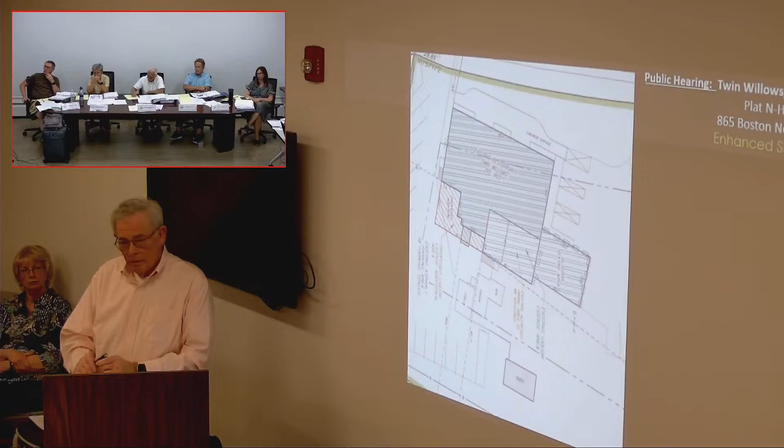You're satisfied from your research that this proposal will have no adverse effect on the impact of the neighborhood, or be detrimental to surrounding property values? That is my conclusion. I believe it will have no impact on any surrounding property value.

Any questions from the board? Yes, sir. With that, I respectfully request that the board grant our application.

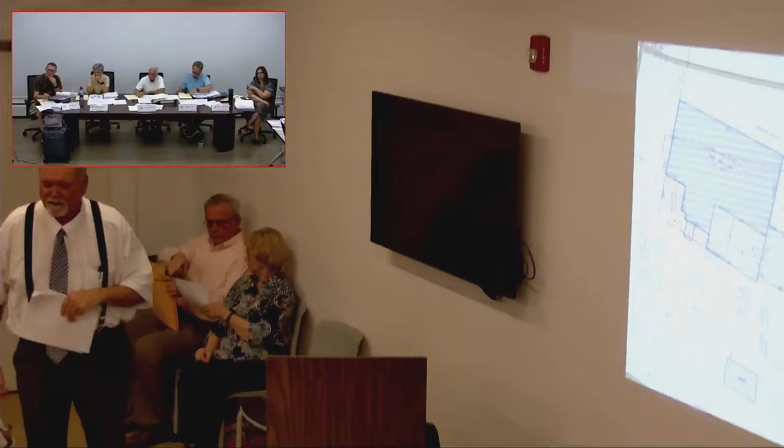The Twin Willows has been here in excess of 65 years. Pictures on the wall show it from the horse and buggy days. I grew up down on South River Drive at my grandparents' house since 1971, when they were still living, and came by the Twin Willows often. When I got to be 18, I spent a little time there, but then I went to PC. In any event, the Narragansett would appreciate your positive vote so they can continue on with their restaurant. Thank you, Mr. Cooper.

Is there anyone who would like to speak in favor of this application? Seeing none, are there any opponents that would like to speak?

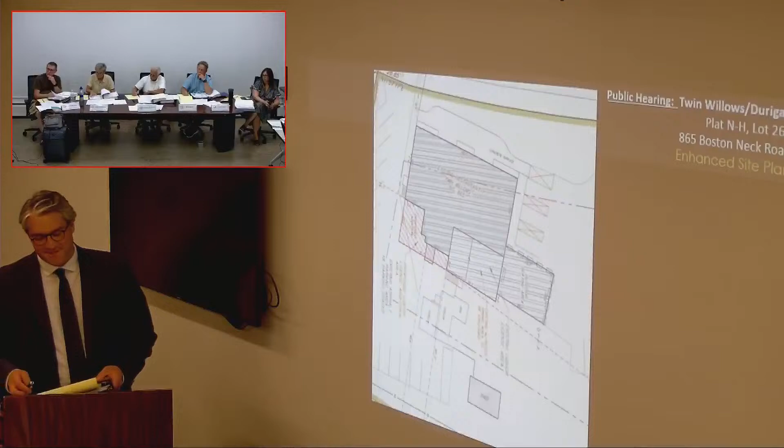Good morning, good afternoon, good evening, Mr. Chairman and members of the board. My name is Edward Pare, P-A-R-E. I am an attorney, and I'm representing Robert Struck and John Struck, who live downslope and directly abut the Twin Willows property. I'm here to voice their objection to this proposal as submitted. Before I get into the two larger concerns, I'd like to respond to two points that my friend Mr. Pimentel raised earlier. The first thing is the change in the law in 2024.

Irrespective of the change in the law, according to the project summary submitted in connection with this project, the application is being reviewed under the 2023 zoning regulations. So to the extent that there's an argument that they don't need the special use permit under section 6.1, 9.1, and section 10.1, we fundamentally disagree with that. I also did not hear that the 2024 change in the law has any retroactive application, especially as it relates to this application. That's just a fundamental disagreement that we have.

The second thing is I wanted to provide a little context. I think the question was flatly asked, what happened with the zone change, or why the difference between what the comprehensive plan says on the future land use map and what the actual zone is, which is residential R40. I can personally attest that there was a lengthy process in front of the town council in 2021 where the town was looking to enact that zone change, to take it from R40 to commercial. That was rejected after a number of hearings on a 4-to-1 vote. So that's the reason.

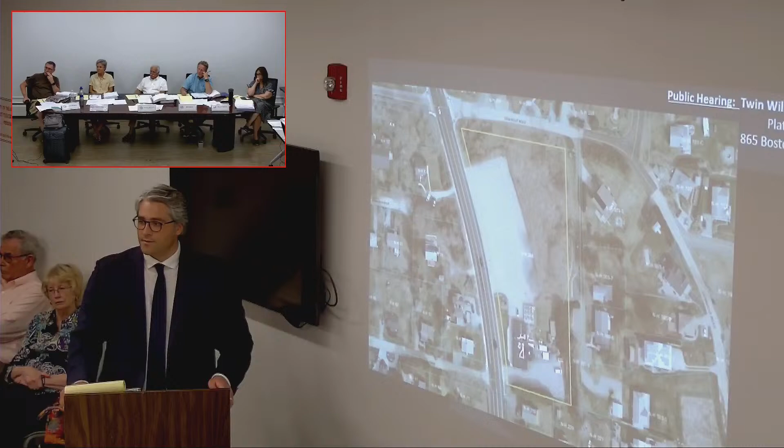So we take what it is now, the structure - if I could get the site plan up too, it might be a little easier to follow. If the existing structure, as of now, is 4,838, and we subtract the expansion in 1991 of 320 square feet, and we subtract the expansion in 1993 of 38 square feet, we get down to a baseline of 4,480 square feet.

Now, I don't actually know, and I have not heard evidence that that was the existing footprint as of what the ordinance calls for, October 11th, 1989. But let's assume that it was. 25% of 4,480 is 1,120 square feet. They've eaten up 320 plus 38 plus now another 595. That takes them up to 953. So they were getting really close to that 25% threshold.

I think it's really important that the board is cognizant of that 25% threshold, because as much math and plans as we talk about here tonight, there's an implicit bargain there. That's the community saying you have a non-conforming use and we're going to give you a buffer. We'll tolerate up to 25%.

But what we don't know is, A, what the existing footprint was in 1989, B, why this shed, which I believe is over 300 square feet, why these existing walk-in coolers - basically taking a fridge and moving it outside - why those aren't counting as accessory structures towards the lot coverage, towards the existing footprint. Layer onto that the expansion of the enclosure of this alfresco dining area. When you start doing the math, you start getting way past the 1,120 square feet.

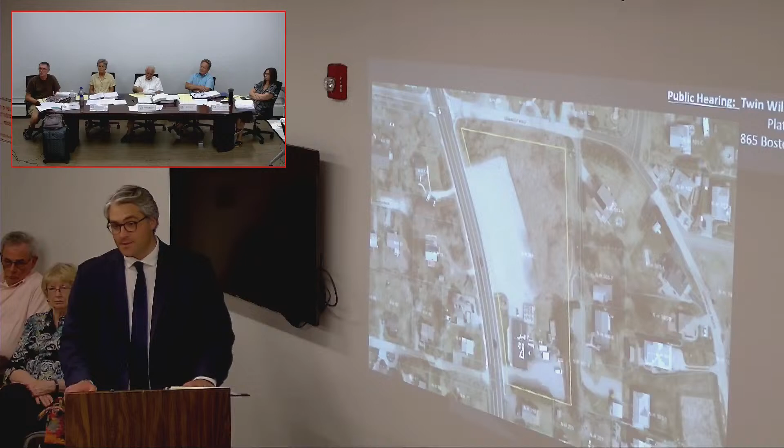What I can tell you is that expert testimony is not this talismanic thing that common sense can't tell. The board knows that being at the top of the hill, the top of the crest, when water comes off a new enclosed structure, it's got to flow somewhere. And right now it's flowing through the Struck's drain in the backyard. I think that needs to be addressed. So no, I can't testify to that as an expert, but as a sentient human being, I think I can draw a fair inference on this.

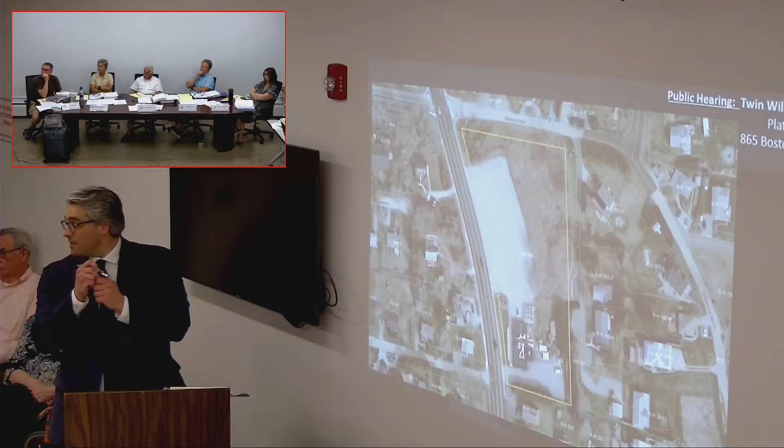Can you point out with the pointer there the property that we're talking about, the Struck's property, because I'm not clear where it was. I believe it is that one. Okay, and that one. Thanks. Thank you.

Any other questions?

Thanks, Mr. Chairman. I just might have more — glad my brother's not a mathematician, I'd be in trouble. But there is an intense slope here, which is part of a significant buffer between the restaurant and the abutting property. I want the board to keep in mind that this road, when these houses were built not that long ago, they came to us. We didn't go to them.

And while we don't do anything to our surrounding neighbors, we don't adversely affect them in any way, we just want you to be aware that we have been here. They knew we were here. They knew that the restaurant business has been here for years. Hasn't changed since I can remember. Yet they built a road, which my clients do not complain about, and they built their homes, which my clients do not complain about. They came to us. Please keep that in mind. Thank you.

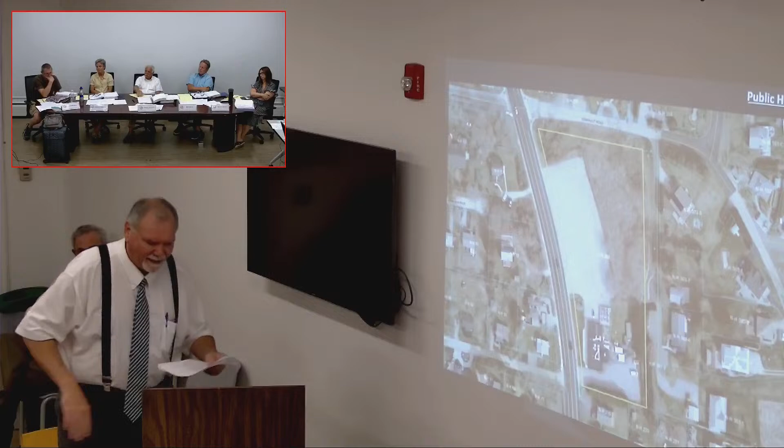Mr. Chairman, if I may, just to also reiterate, if you look at page 2, finding of fact F, there was a letter from the town's engineering department from September 27, 2023 that approved this project as it relates to supplementary drainage and the town zoning ordinance of section 7.7. Thank you. And then I also wanted to address the floor plan or the footprint of the building as it relates to October 11th, 1989.

Those numbers can be seen on page 3 of the staff report. Staff reached out during the review process of this application to the tax assessors, and they provided us with all of the records of the footprint of this building that dated back to 1982, I think. And the closest we had to relate to was 1992. Based off of our calculations, the footprint present at that time totaled up to 4,346 square feet. And taking the numbers that staff calculated based off of the proposed additions in the rear, the increase would only be 20%, not anywhere near 25%.

Thank you, Ryan, didn't have to ask those questions. Okay, are there any other opponents that would like to speak?

If there's no other questions from the board, I have a question, please. So when it comes to what's actually going to be added, the back deck — don't look at it, please — this back deck is going to get enclosed. That area is going to stay pavement and a patio area. That was COVID outdoor dining, and now the legislature has approved that permanently.